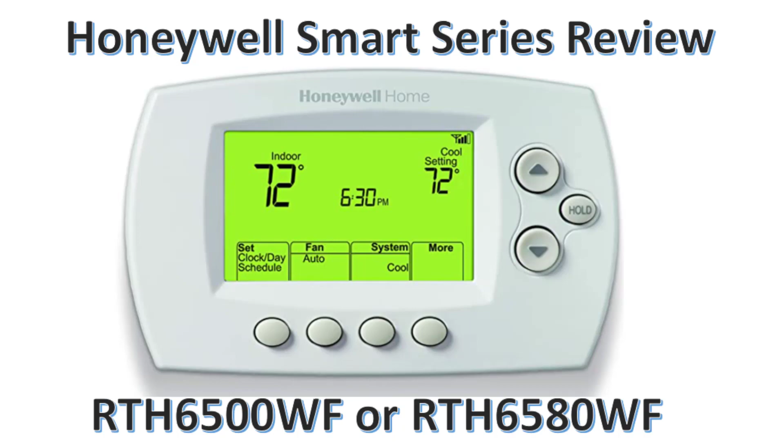Okay, I'm gonna give you a review on this Honeywell Smart Series. As you can see, this is the model right here. You have the RTH6500WF and you have the 6580. They're the same, just a different Smart Series number.

I've had this thing for going on, I think 10 months. I got it in February and it's November now, so 9 or 10 months. But this thing is awesome. For the price, you can't beat it. If you want to save money, it's easy to install, easy to program.

Let me give you the disadvantages that I don't care about with this, and there's not too many of them. The first one is this light. You see the light, if you hit a button it only stays on for like 6 seconds and then goes off. After 6 seconds, you really can't see nothing.

So you really have to try to, I'm gonna zoom in to just show you. You see right there, you got the back. But once you hit it, I'm gonna go back, it stays on for 6 seconds, and I don't like that part. I wish it had a button you could hit to keep the light on as long as you want, and then hit it again to turn it off.

But to see anything, you have to hit a button to bring it on. Like I said, you click that button or any button, and it stays on.

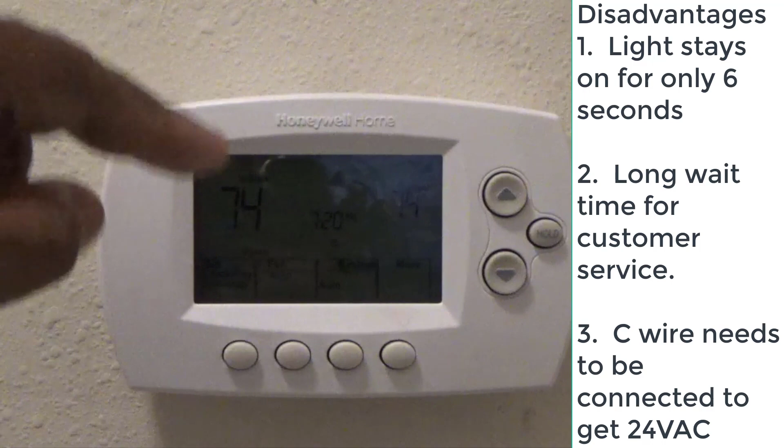If you look at my video, it'll either be in the description or in the drop down on how to install it. What I had to do is go to my furnace and jumper the blue wire, or whatever color, but they call it the C wire. I had to jumper it across in my furnace to get my 24 volts AC to my thermostat. You got to have that C wire connected to get power to this thing, especially if you had the battery operated one. But other than that, that's the disadvantages.

All the other things I have for this are the advantages. You have the apps, the app, and the ease of setting this thing up. You can use it anywhere, you could be anywhere in the world. If you got Wi-Fi connection, like if we were in Mexico, we can change our thermostat from Mexico, or if I'm in Jamaica, wherever. We got control of all of that.

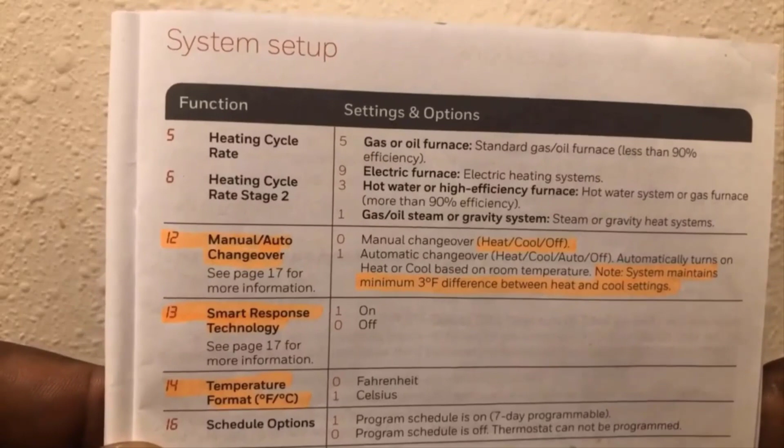Another function is function 12, the manual auto changeover. I think that's very good, it's on page 17. That means you can set it on automatic and it'll sense the temperature in your house and automatically change over from heat to cooling. In Houston, you never know, it may be 50 degrees one day and 80 the next, so you don't know when to turn your AC on or your heat. This will automatically do it.

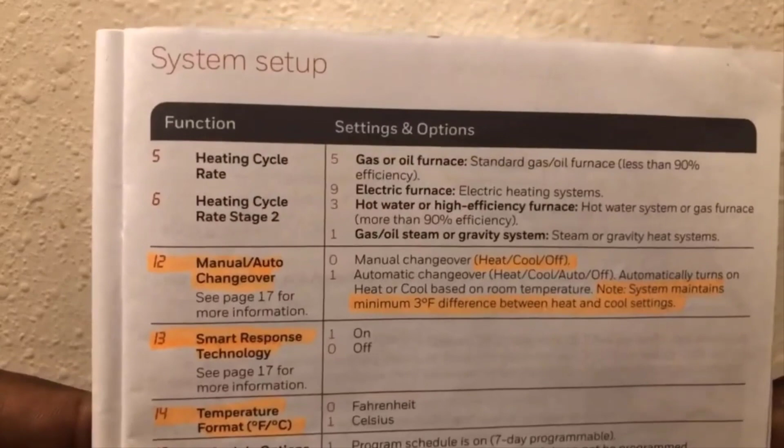I'm gonna show you, we're gonna go through the process of setting that. One thing you need to have, make sure you keep this manual. This manual is very important, it has all your different functions, and you will also need to connect to the Wi-Fi. You will need your MAC ID number.

So you would need that number. Before you set this up, make sure you go in your manual and write down your Wi-Fi information so you won't be going back and forth. So write down your Wi-Fi information.

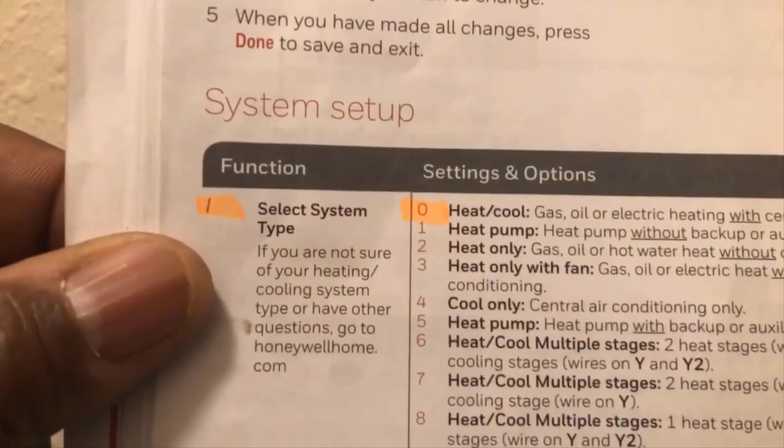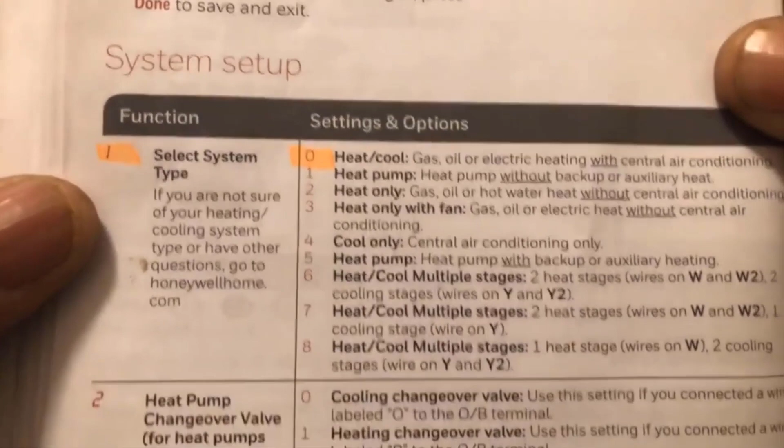What I want to show you here is on page number 18. It talks about setting the system functions. It comes from the manufacturer already set with function 1 and 0, that's for heating, cooling, for gas, oil, electric heating with central air. That's what I have, so I didn't have to go through the functions and set this up. But as you can read through here, I'm gonna display this to you in case you lose your manual.

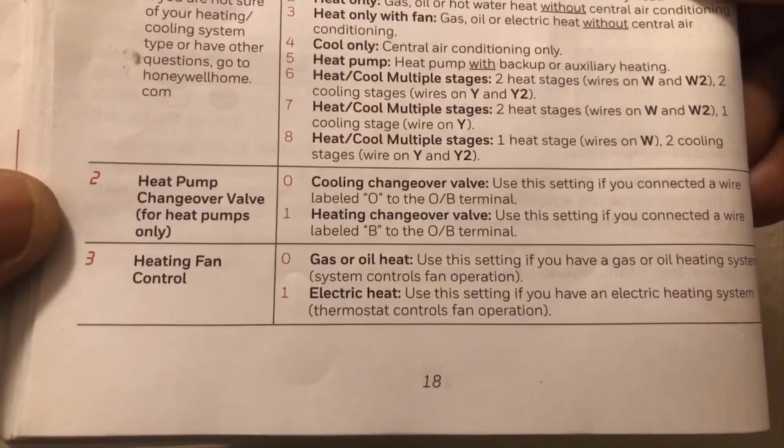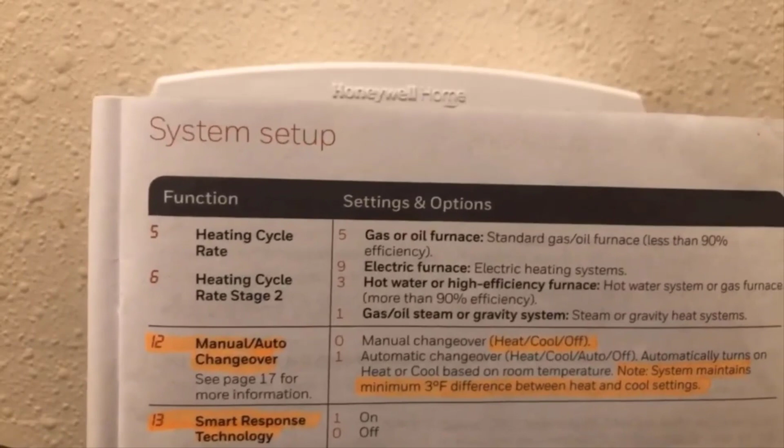Function 2 is just for heat pump changeover valves, and number 3 is for heating fan control. I highlighted a few things that we're gonna go through that will help you. Number 5 is heating cycle rate, and number 6 is heating cycle rate 2.

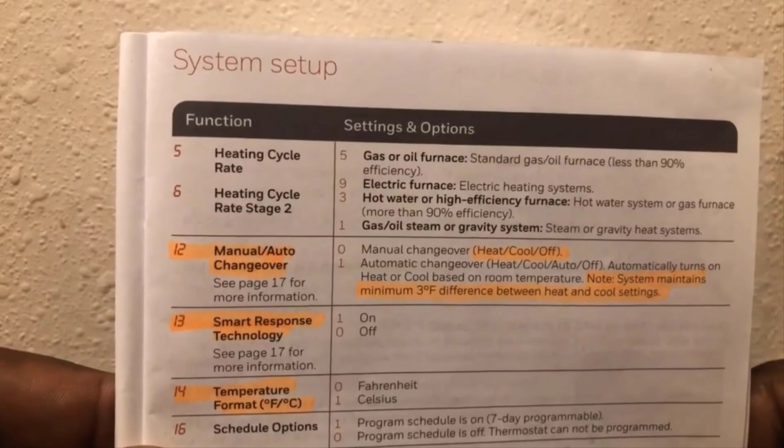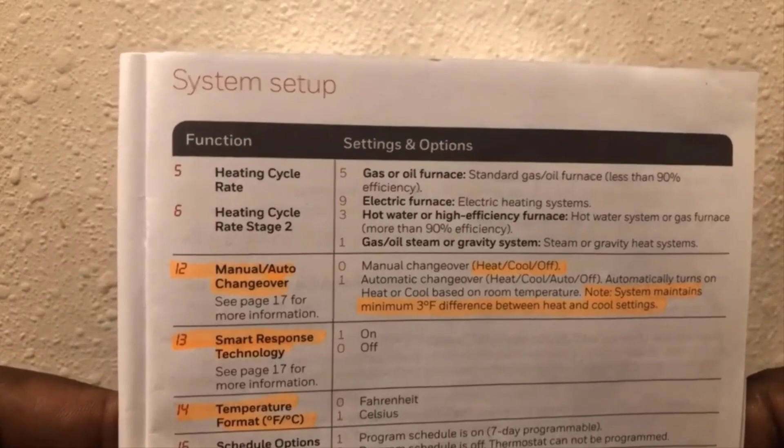Number 12, the manual auto changeover, I think that's very good. It's on page 17. That means you could set it on automatic and it will sense the temperature of your house, and it'll automatically change over from heat to cooling. In Houston, you never know, it may be 50 degrees one day and 80 the next. So you don't know when to turn your AC or heat on. This will automatically do it, and I'm gonna show you the process of setting that.

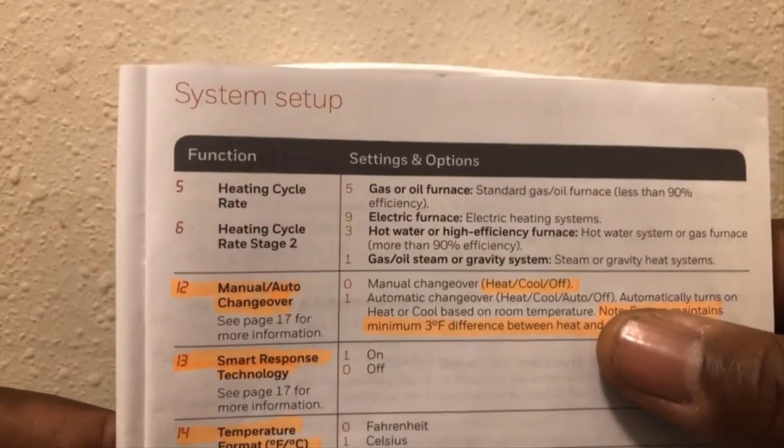Right now mine is set for 12 and 0, the manual changeover, just heat, cool, and off. Let me show you right here. You see it's on heat. I push it again, it goes to off and cool. So it just has heat, off, and cool. But we're gonna go through the process of setting it to where it has automatic.

That's right here at number 12. We gotta put it on 12 and change that to 1. We're gonna go through that on how to do that.

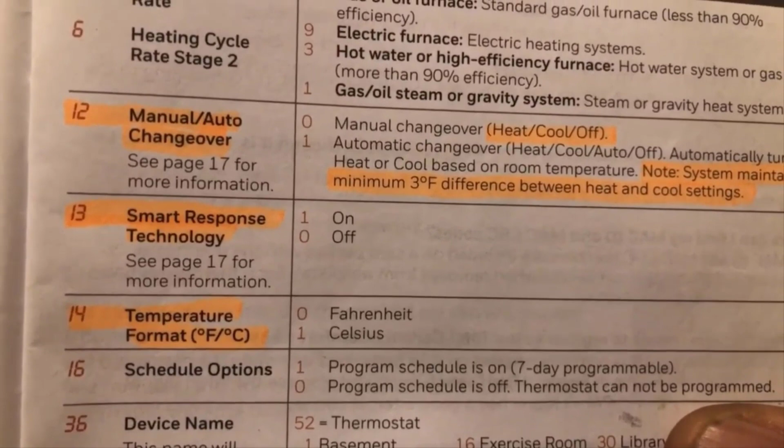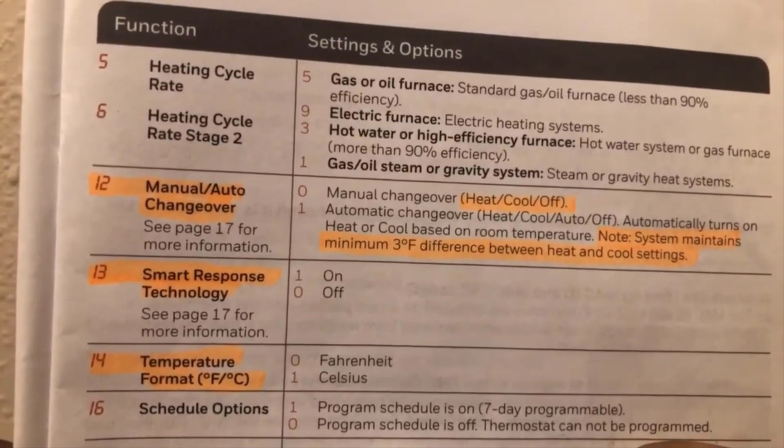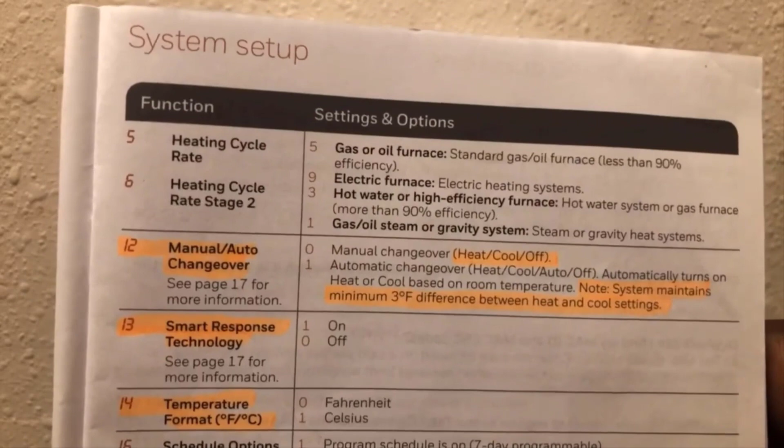Number 13 is the smart response technology, and right now mine is on. That means if you got your temperature set for heating, say in the morning you want it at 70 degrees, it will sense how long it takes your house to get to 70 degrees. So it may come on 10 minutes before, if it recognizes it takes 10 minutes to heat up to 70 degrees at 6 o'clock. So at 6 a.m. it would come on probably at 5:50.

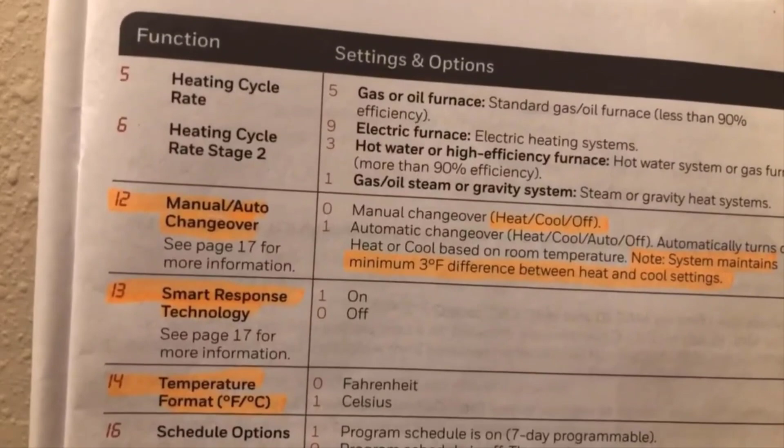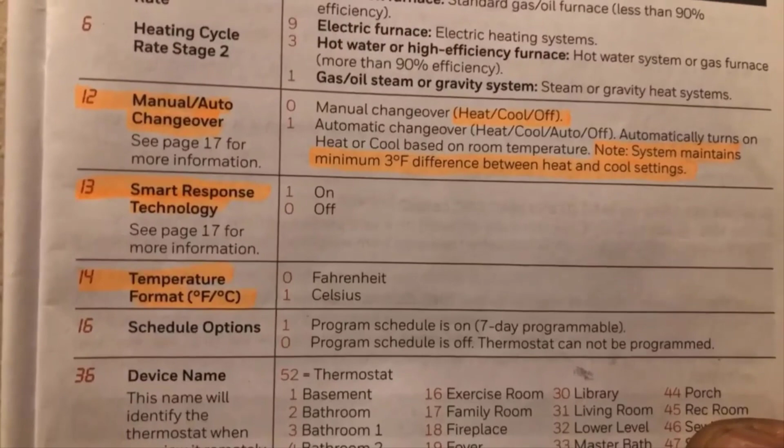So that's what smart response is, and you could turn that on and off. Number 14 is for Fahrenheit and Celsius, which I use Fahrenheit. If you're over in Canada or the UK, you may want to change that to number 1, which is Celsius.

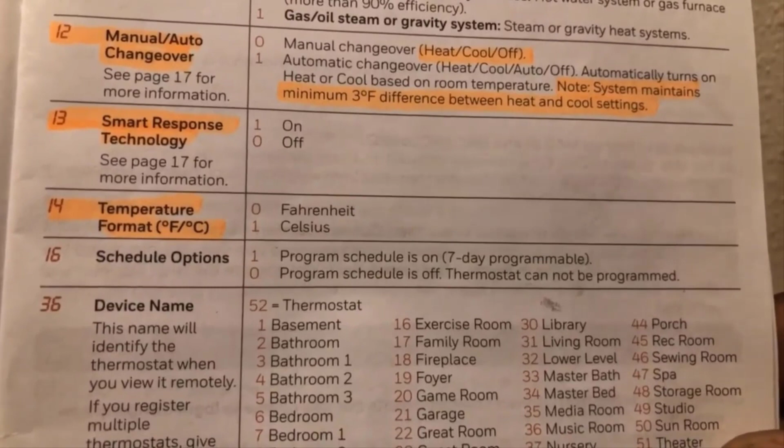Then you got your schedule options. Mine's set for 16 and 1, so that's the program, 7 days a week, and you can turn that off.

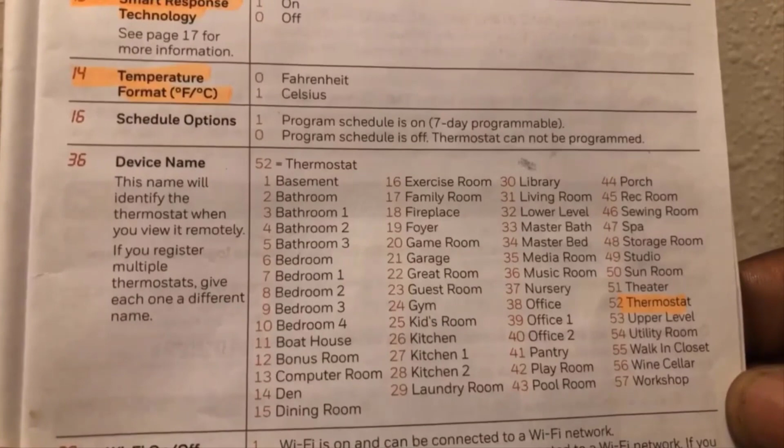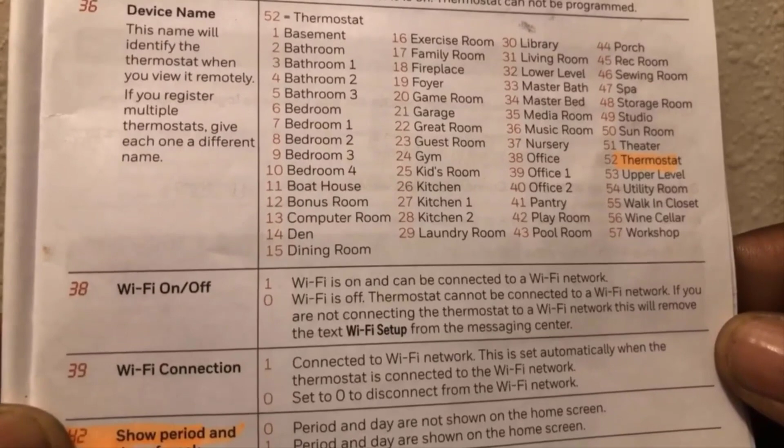Then you have your device that's already set up, it's number 36, you got your thermostat, mine's 52. Then you can turn your Wi-Fi on and off, which mine is on 1. The Wi-Fi is on and can be connected to the Wi-Fi network. If you want to disconnect it, just turn it to 0, and that'll turn it off if you don't want to control it with your phone.

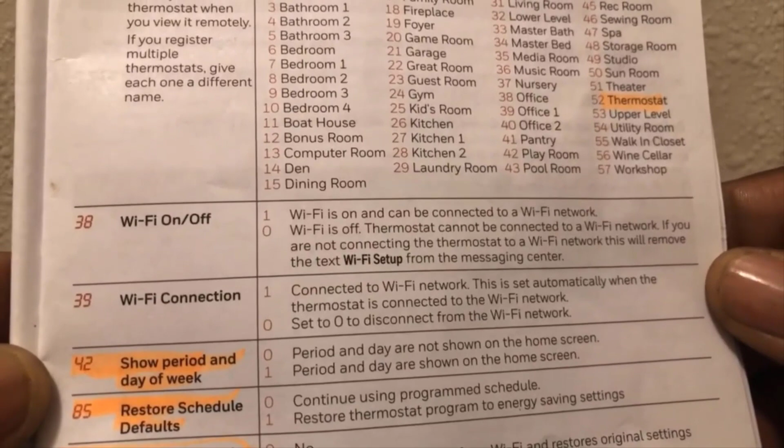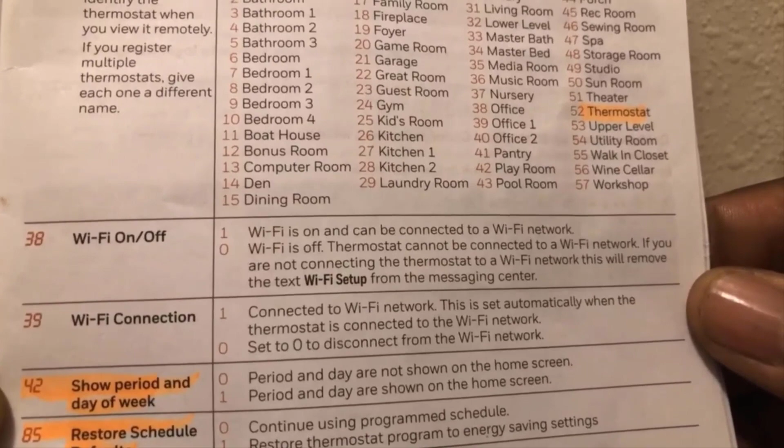Number 39 is Wi-Fi connection, and mine is set for 1, it's connected to the Wi-Fi network. This is set automatically when the thermostat is connected to the Wi-Fi. If you want to turn it off, set it to 0, it'll disconnect it from the network.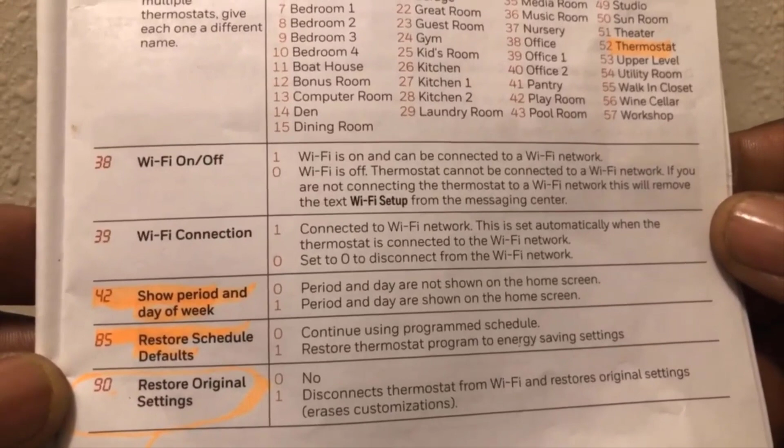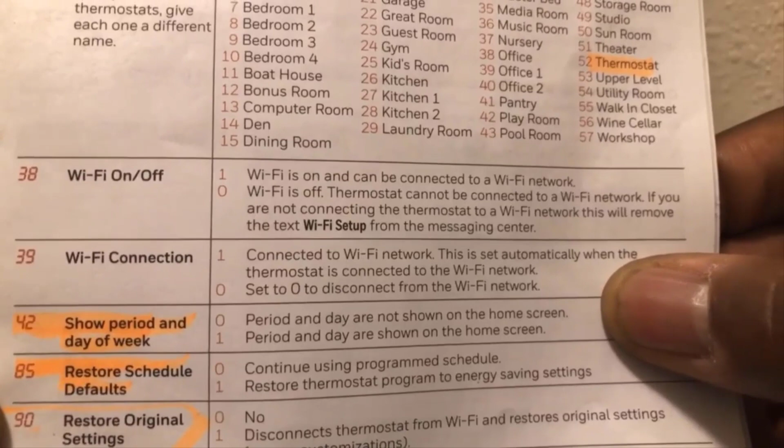I got number 42 highlighted, it shows the period and day of the week. Mine does not show on my thermostat home page, but if you want to, you just change that 42 and move the arrow up or down to 0 or 1. You can put it on 1.

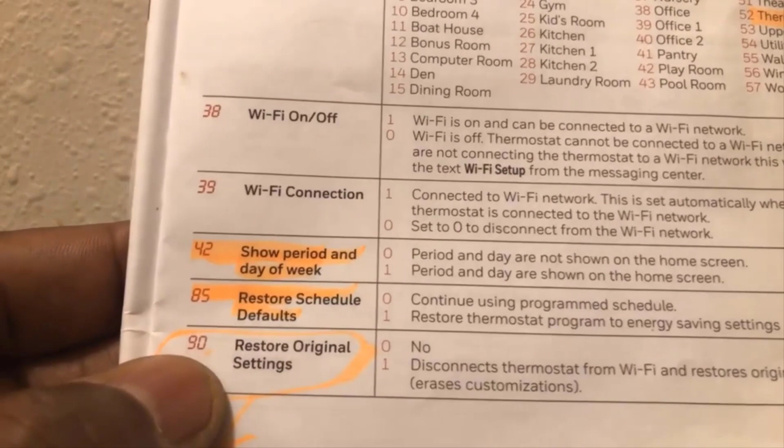It'll show it on the display screen right here. Number 42 shows the period, the days of the week. I don't display mine on my home screen, it's just a lot of stuff on there, as you can see. I don't want it displayed up here, but you can, you just have to change that 0 to 1. Then number 85 is the restore schedule defaults, so if it's on 0, it'll continue using the programmed schedule that you have.

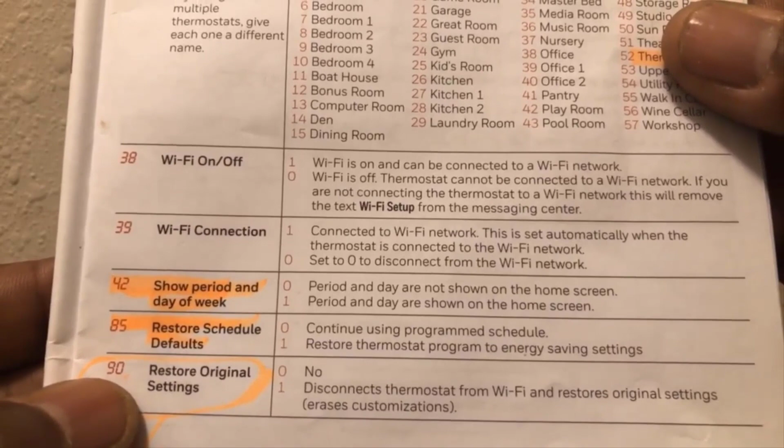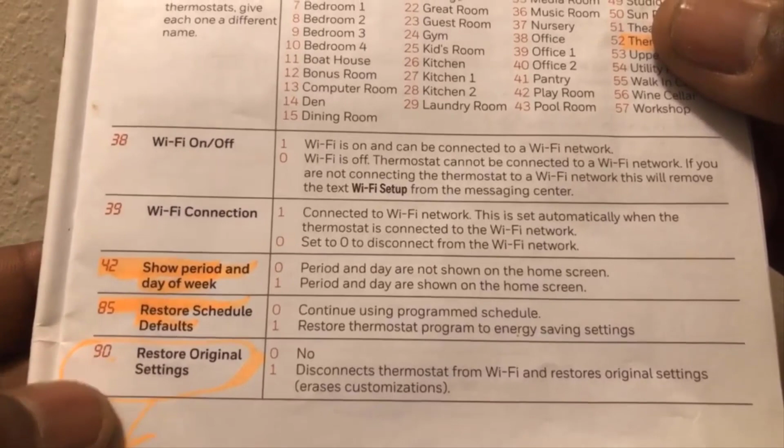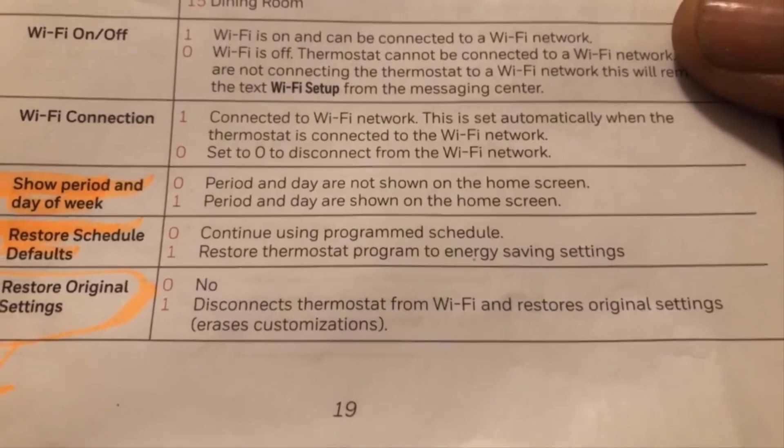If you don't want that, go to setting 85 and put it to 1. It'll restore the thermostat program to the energy saving mode settings. Number 90, be careful with this one. If you set it to 1, it's going to disconnect the thermostat from the Wi-Fi and restore original settings, erasing everything.

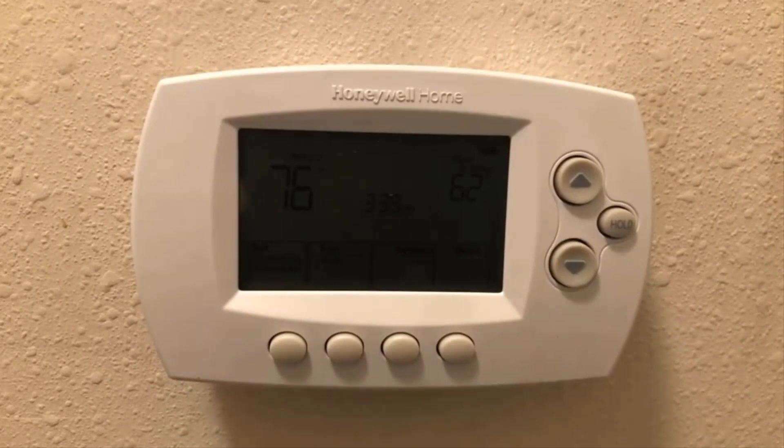So let's do a few of these right quick. I'm going to hit a button so you can turn the light on. To get to the settings, you hit the fan and the up button, and hold it for 3 seconds.

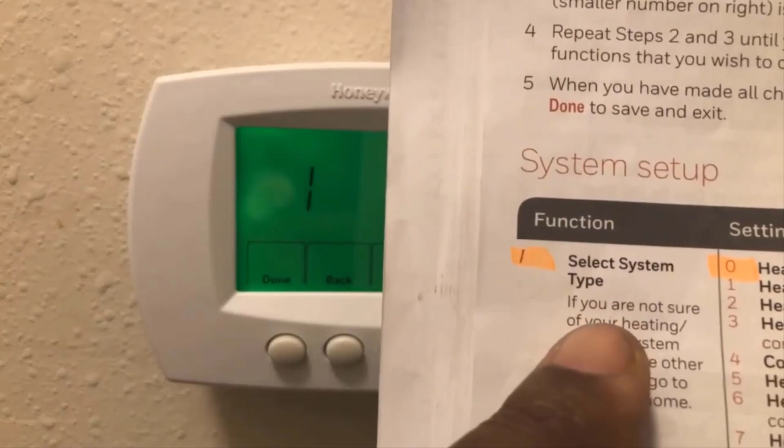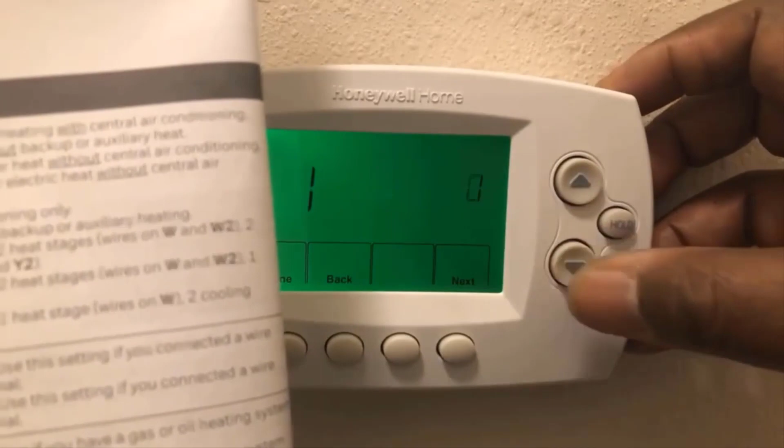As you can see, it has a 1. That means the big 1 is a system setting type. Mine's set for 0. You can go up to 1, which is for heat pump, or up to 2, which you can change to heat only, but I'm gonna go back to 0. That's how you change it up and down, just using these arrow buttons.

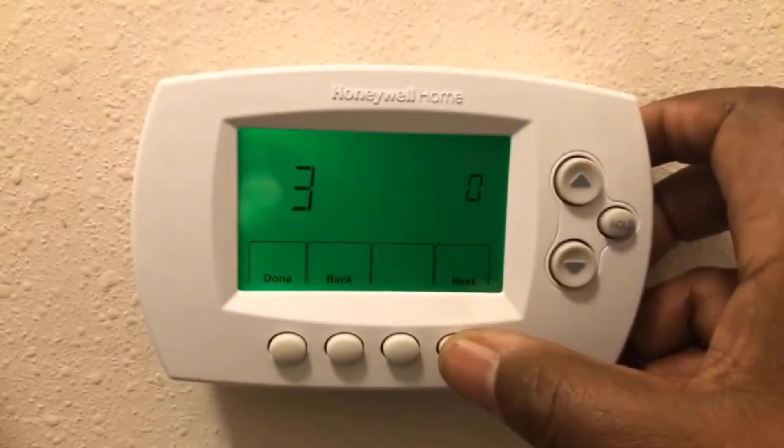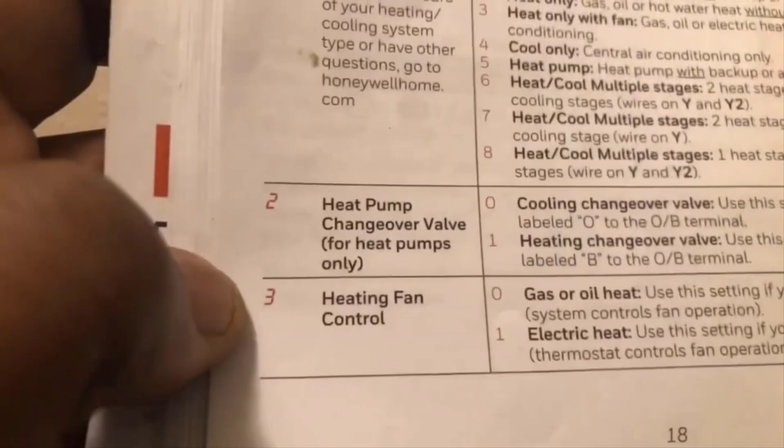Then you can hit the next button to go to number 2. Number 2 is heat pump changeover valve, which I don't have one. Let's go back—see, it skipped from 1 to 3, which is heating fan control. So you hit next.

Next is 5. Remember I showed you that right there—5 is heating cycle rate. We're not gonna mess with that. We're gonna skip. It skipped 6 and jumped to 12. This is the one I wanted to discuss with you.

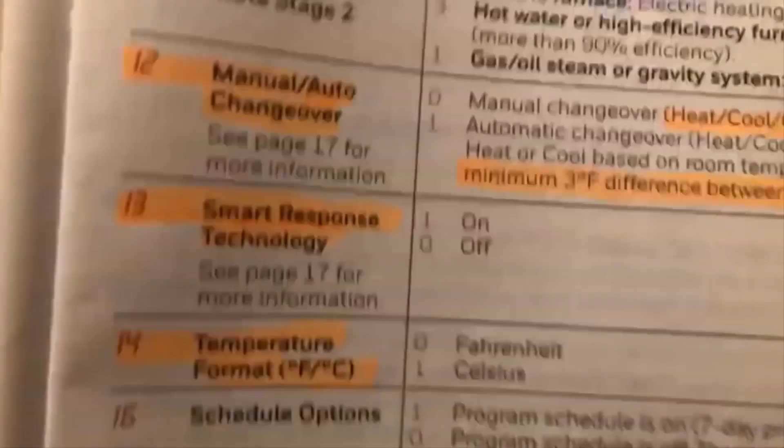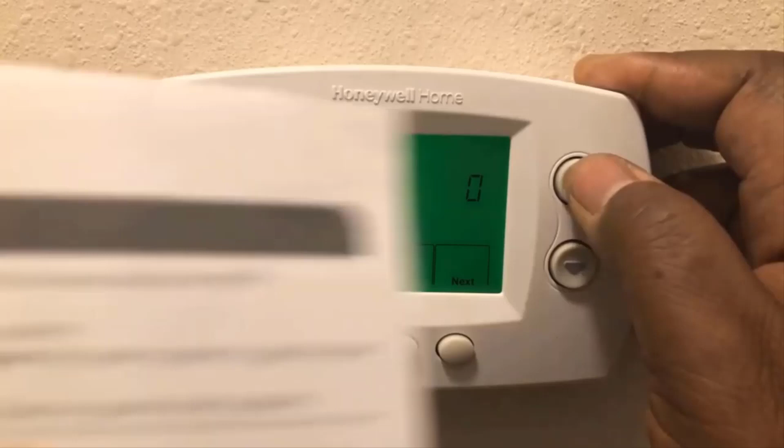It's the manual auto changeover—it'll automatically switch over from heat to cool. Right now mine is turned to 0. Remember I showed you before, it just had heat, cool, and off. Now I'm gonna change it to 1. I've just moved the arrow key, and 1 on number 12 will automatically set it up. So I'm gonna just leave it at 1.

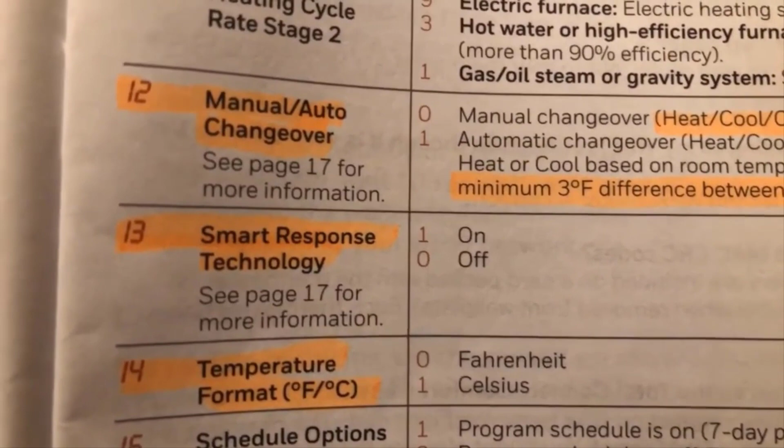Then we're gonna go to the next one, 13. That's the smart response we talked about. It responds based on how long it takes for a certain amount of time, like I said before—if you've got it set for 70 degrees at 6 in the morning, it'll come on 10 or 15 minutes before that if it takes that long to heat up. Mine is on, as you can see, set to 1.

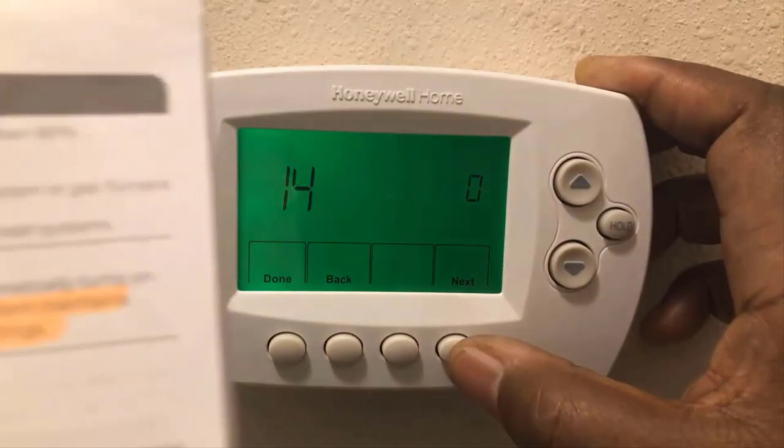The next one is 14. Mine is set for 0, which is Fahrenheit. If you want Celsius, just move that up to 1 and it'll switch to Celsius. So I'm gonna set mine back to Fahrenheit.

The next is 16, that's your schedule option. Like I said, mine's set for 1, for programming 7 days a week. Then you have 36—like I told you, that's the device. Mine's 52, you see I got it highlighted there.

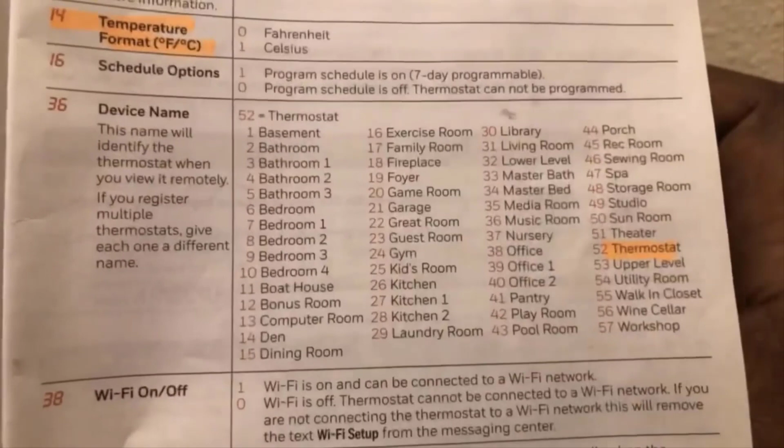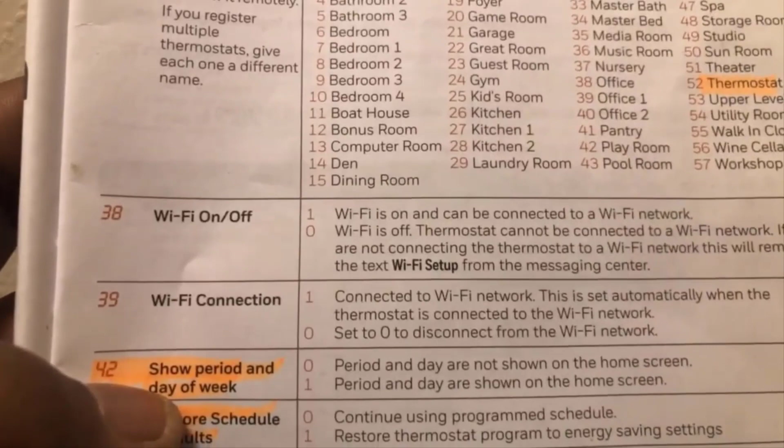It's the thermostat. Next one is 38, it's your Wi-Fi off and on. We're not gonna deal with that—like if you want to turn it off, mine should be set for 1. And the next one would be 39, which is 1.

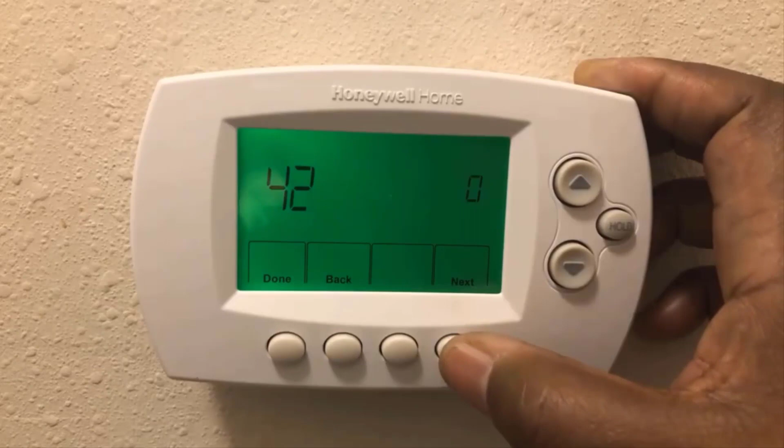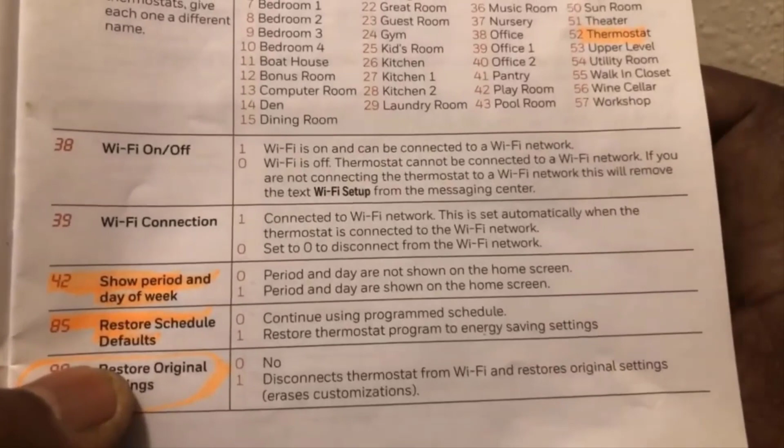Number 42, mine is set for 0. That's whether the period and day are shown on the home screen. Mine is set for 0, so it's not shown—the period is not shown. If I want it to show on my thermostat, I'm gonna go ahead and change it to 1 just to show you.

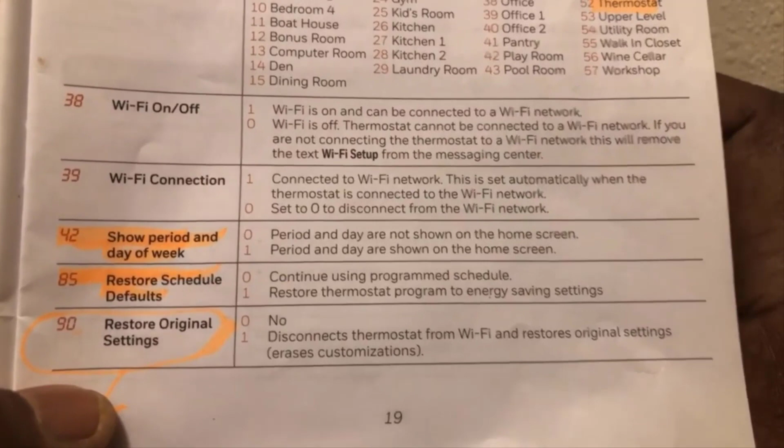The next setting would be 85, and 85 is your restore schedule. Mine is on 0 because I want to continue using the programmable schedule. This one you have to be careful with—you don't want to change that to 1. If you change it to 1, it's gonna erase everything, so you'll have to start all over from scratch to program it.

So that's all to it. We're gonna go back. When you finish, just hit done, or you can go back to other settings—see how you can go back. Or if you're finished with everything, hit done.

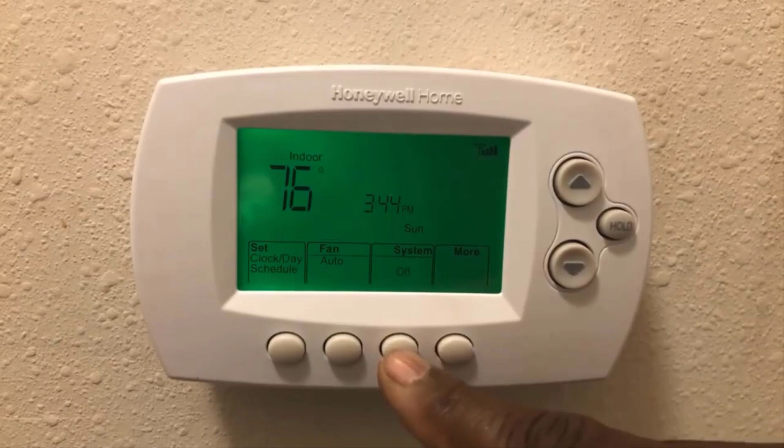You got cool, heat, auto, and off. So if I want to set it on auto, now I don't have to be going back and forth changing my thermostat whenever the heat, you don't understand the temperature if it goes up or down. So the auto, I really like this. I won't have to be going back and forth turning my AC and my heat on.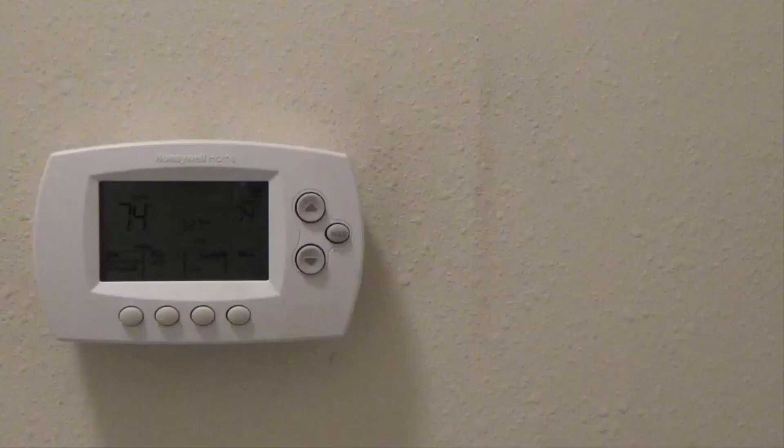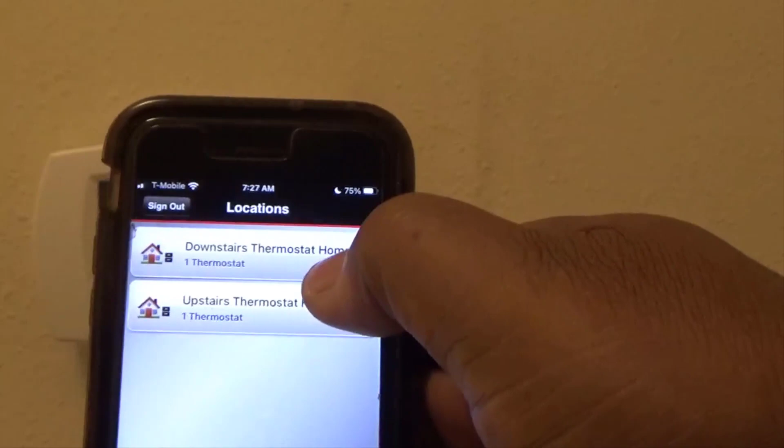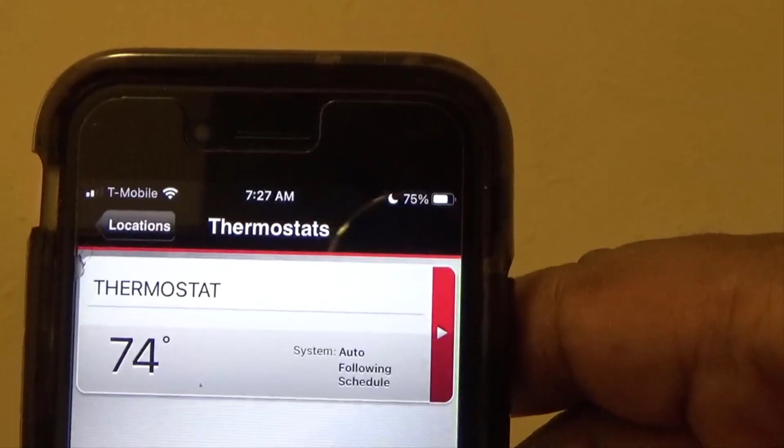It shows right now in my house it's 74 degrees. I don't know if you can see this very hard with this light, but it'll tell you if your system is running or not. Let me zoom in. See, my system is not running right now. If it was running cool, it'll have like a little blue spot right there, looks like a snowflake. If the heat is on, it'll have a red dot right there. So I'm gonna zoom out.

Let's go right here and we're gonna bring it down to 73. We know it's 74 in the house, so we're gonna bring it down to 73 and hit submit.

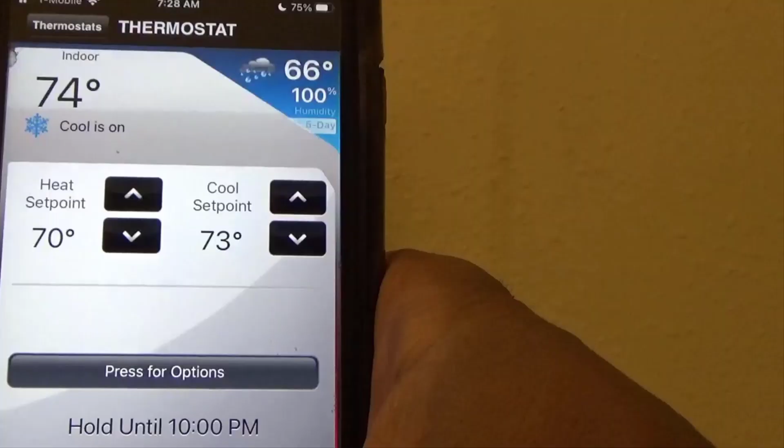We're gonna hit up here, thermostat. As you can see, I'm gonna zoom in. You see right there, it has that blue. That lets me know it's running. So I know this AC unit is on.

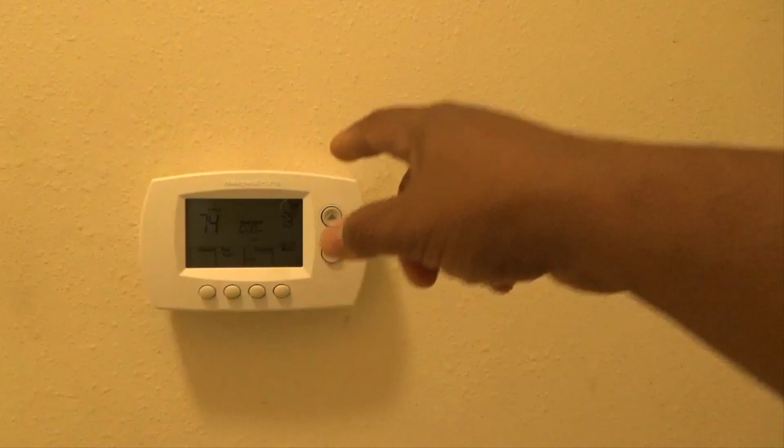And if I turn it up right here, if I bring this up, or I can do it right here, or I can do it on my app, I can bring it up to maybe 80, and it'll bring on my heater. So I'm gonna show you some of these functions right here.

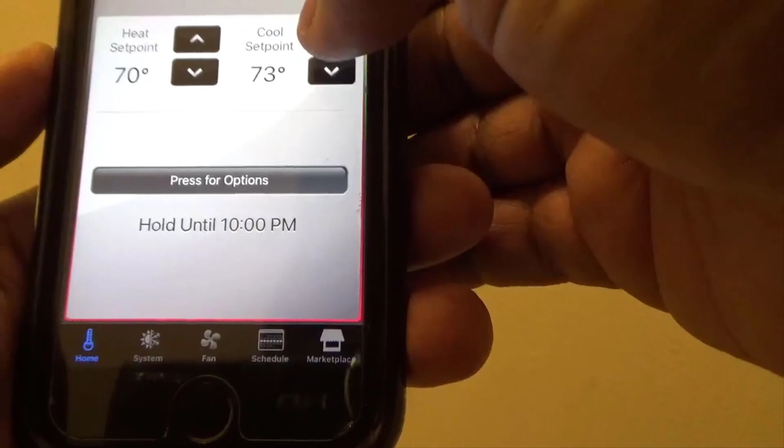We're gonna go back. We're gonna hit the downstairs. Like I said, it's running right now. I'm gonna click on that. And you could change it up or down. I'm gonna change it back. Hit submit.

Okay, down here at the bottom, you have your home, then you have your system, you have your fan, and I have my thing set on auto. So we're gonna hit system. You see what it shows right there, your system. I got auto, or I can just turn it to heat or cool, or I could turn the whole thing off right there.

Okay, and then you have your fan, and you want your fan on auto. If you put it on, it's gonna continue to run all day. So you want that on auto.

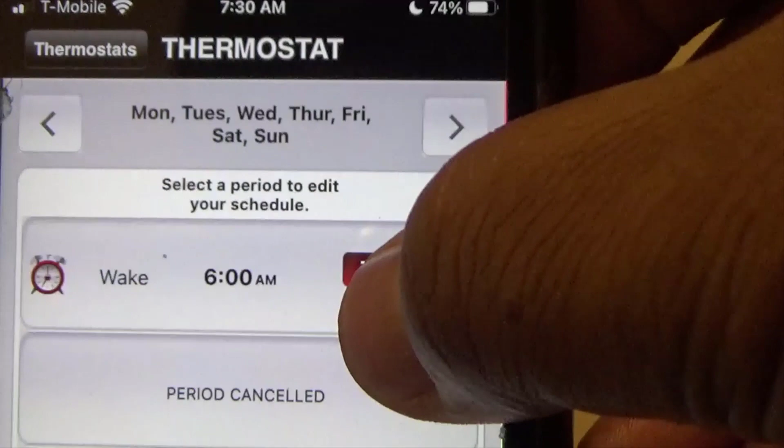Then you have your schedule in here. You click on this at the bottom. The heat will come on at 71. If it drops below, gets at 71 or below 71, my heat would automatically come on. And if it gets over 74 degrees in the house, my AC will come on to cool it back down. So I just got two periods set up. I got one at 6 a.m. and the other one is at 10 p.m.

So that's how the auto works. And if you look at it, I'm gonna zoom in. If you read the manual, say for instance I try to change this, it's got to be at least 3 degrees apart. So that's 71.

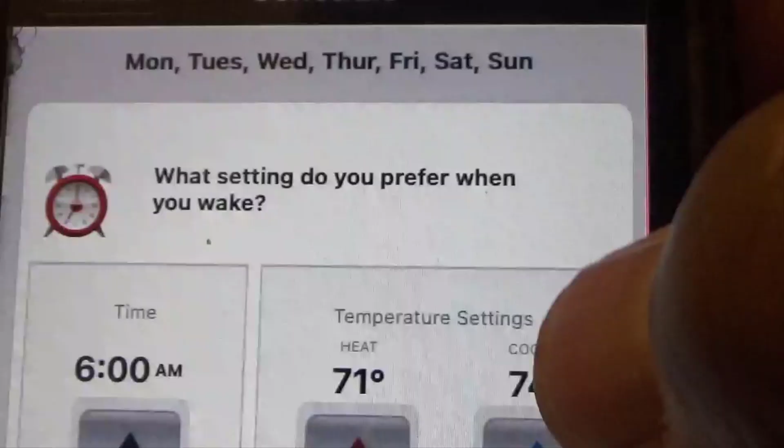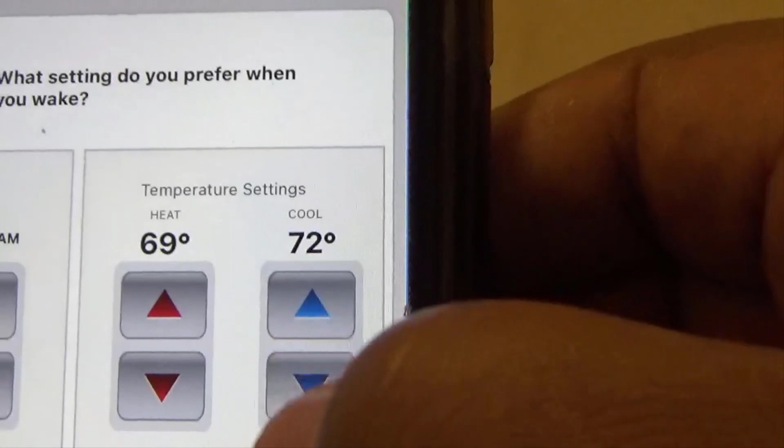So if I try to drop this down right here, I'm gonna click on it. Say for instance I try to drop this down to 73, this is gonna drop down to 69 automatically, watch. Or it drops down to 70, I'm sorry. So that's 73 and 70. So if I go to 72, it goes to 69. But if I go up, it won't do that.

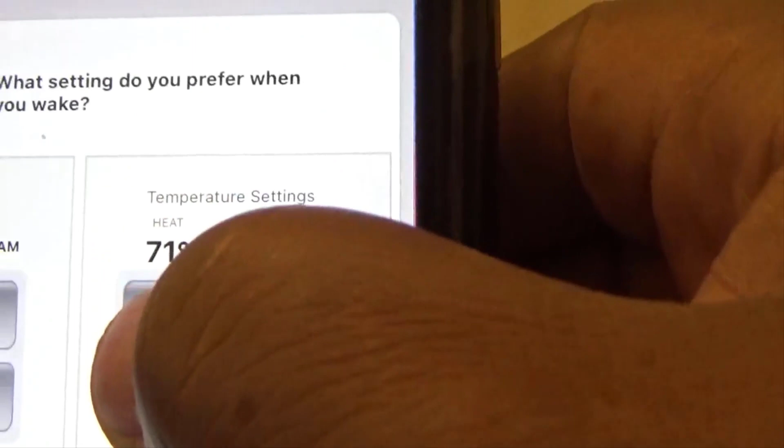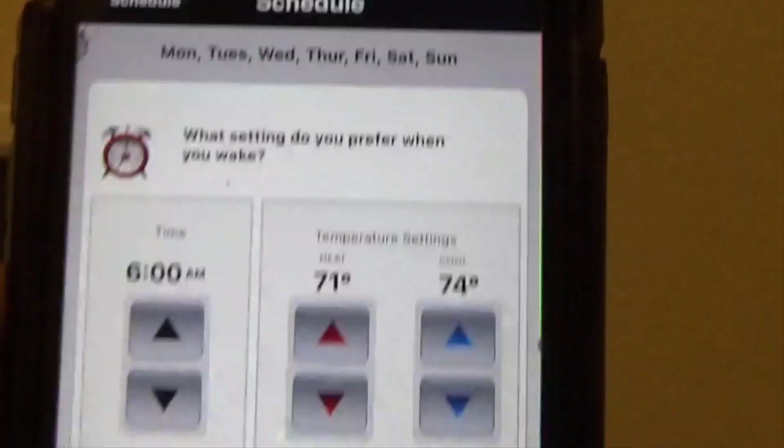So I'm gonna change it back to 74, and I'm gonna bring this up to 71. If I bring that up to 72, that's gonna jump to 75. You see that? So that's how this system right here works. I'm gonna just go back. I'm gonna hit leave.

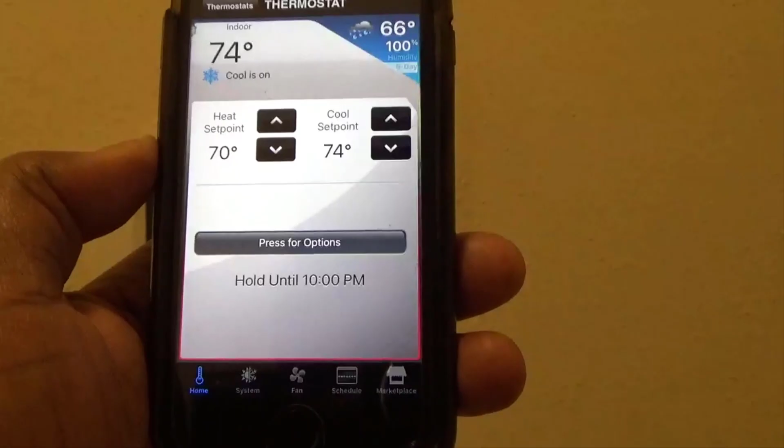And they got another cool feature on here. Also, if you look down here, it's called the marketplace. What it is, I think it's free, but what you can do is to help cut your costs, they will monitor this for you. So they will look at the weather. They say, hey, a cold front is coming in, so they adjust your thermostat to get ready for this cold front. So they're watching the news and everything. I'm gonna click on it. You can hit enroll, and then you go through. I'm not gonna enroll, you know, I'm gonna just hit it and just show you what it looks like.